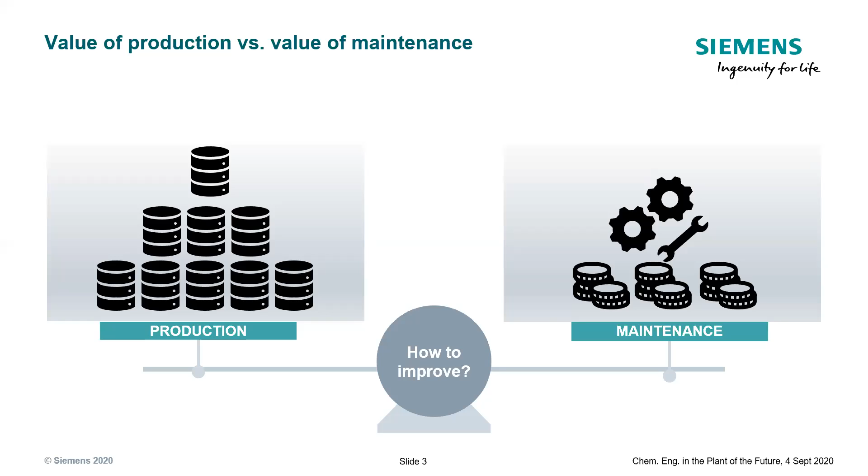Moreover, as we know today, it is more and more difficult or almost impossible to build a new plant, especially in the Western countries. Therefore, there has been in the last years a growing attention to maintenance, and in particular, how the digital application can improve operational efficiency. And behind the digital application, I mean, digital means everything. Behind the digital application, we mean connectivity, analytics, and cloud. Lower cost of sensors, large availability of data, and larger broadband connection.

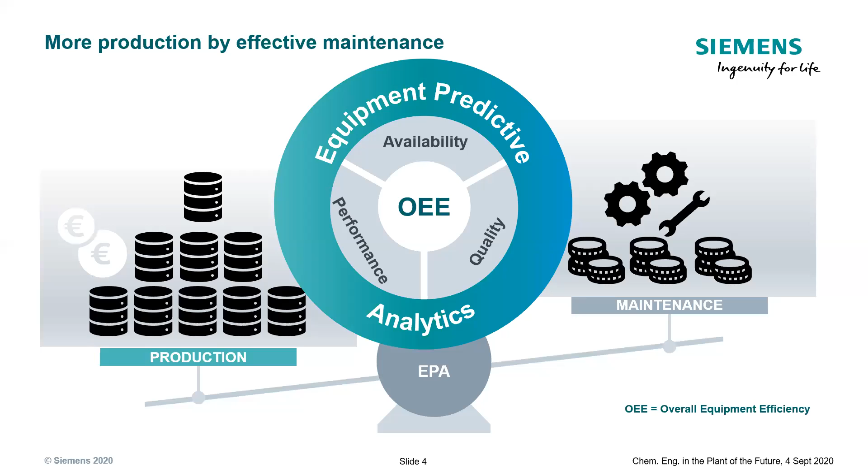For this reason, many data-driven analytics solutions have been developed to extract value from the data. This with the aim to improve the operation by more equipment availability, what we call uptime, and to improve the performances. The greater the process efficiency, the higher is the production. So what we need is to push plants to reach more than 100% of their design capability. Equipment predictive analytics is something today very attractive for all the industrial sectors, but there are significant differences and also different results between the different approaches.

If the algorithm is becoming adaptive, which means being able to adapt the model by new real-time data, it will be possible to recognize new patterns based on the current unit behavior. This is what we call machine learning.

Now, if we add a new layer of artificial intelligence that is called knowledge-based or case-based reasoning, which enables the EPA, I mean the equipment predictive analytics algorithm, to reason, to make choices by a database of snapshots of process conditions, we can improve significantly the response and related action effectiveness of the tools. But we will say something more in some slides later.

So just for showing something without too much detail, but anyway, going through the main steps of what is the approach in equipment predictive analytics. Three main steps. First one is to identify the target sensor correlation. In a plant, around the unit we have a huge number of sensors providing info about the equipment behavior. Depending on the focus objective or the target we have, we should identify which are the output variables and which are the input variables to build the corresponding best EPA model.

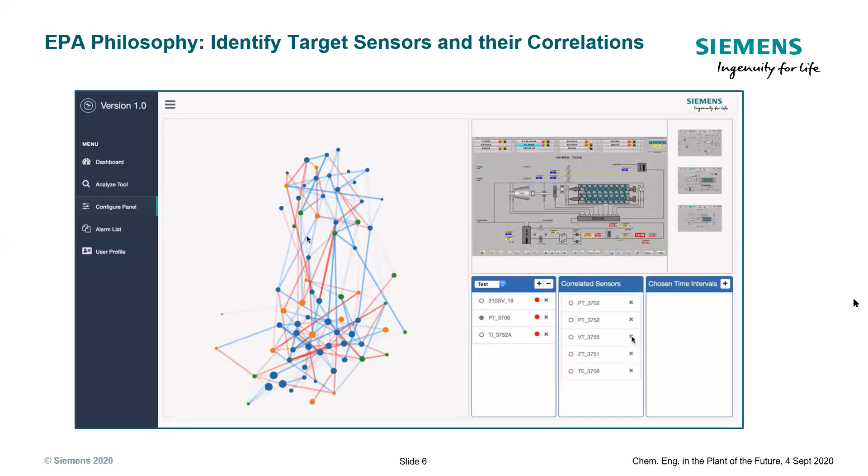Okay. So once the model is identified, what is needed is to train the model. And as you know, any data-driven model, and this is important, based on statistic or neural network algorithm, can be used to predict only something that it learned. In other words, it cannot predict a unit behavior that wasn't presented to the algorithm through the historical data.

Therefore, there is a need to select properly the data set to be used for the model to train. And either we spend hours by the data scientist, or we use a proper user-friendly tool that allows the user to move in the ocean of info and select the proper one to create a reliable EPA model.

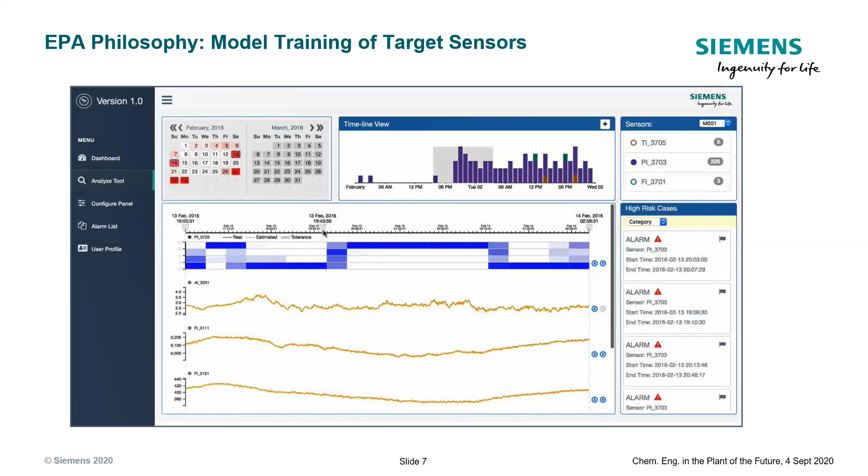Once the model is designed, now we need to use it for monitoring the equipment behavior and to predict fault and anomaly. There is no time now to go through all the details presented in the slide, but what is important to underline is the capability to create, through the tool, intuitive dashboards representing a number of target sensors through simple and schematic types of plots, providing the operator with a clear overview summary of the process condition.

But anyway, despite the dashboarding, the EPA tool based on the predictive behavior should also provide alerts whenever a constraint or a threshold has been violated.

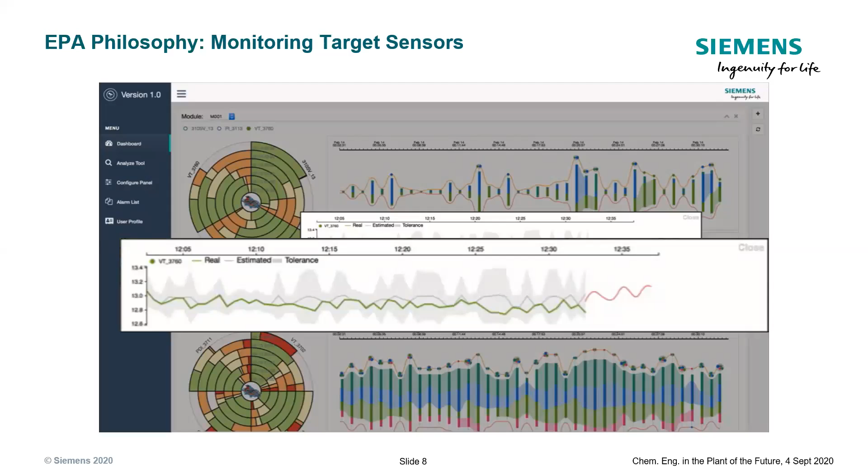So now let's move to what we mean with the artificial intelligence layer. As mentioned before, a machine learning tool is based on a pure data-driven approach, and it has two main limits. It provides an alert without suggestion on remediation, and it could be subject to false positives. This is something very important, which means that the alert could be generated from, let me say, numeric noise or bias, and if judged alone, it could bring to a wrong decision.

So artificial intelligence can help to improve performance of the machine learning tools by what we call CBR algorithm, or case-based reasoning, or knowledge-based approach. This consists in capturing the know-how or the knowledge of experts and experienced people in a kind of data archive matrix. Each matrix will consist, for each equipment, of a number of historical fault cases represented by the value of the sensors in that condition. So a snapshot represents the status of the equipment in that condition, with the corresponding procedures for the anomaly resolution.

The CBR algorithm will compare the data coming from the machine learning with the snapshots in the data archive and reason among, let me say, the similar conditions. It can provide validation of the possible alerts, at the same time presenting in advance the list of actions to be taken to resolve the potential fault.

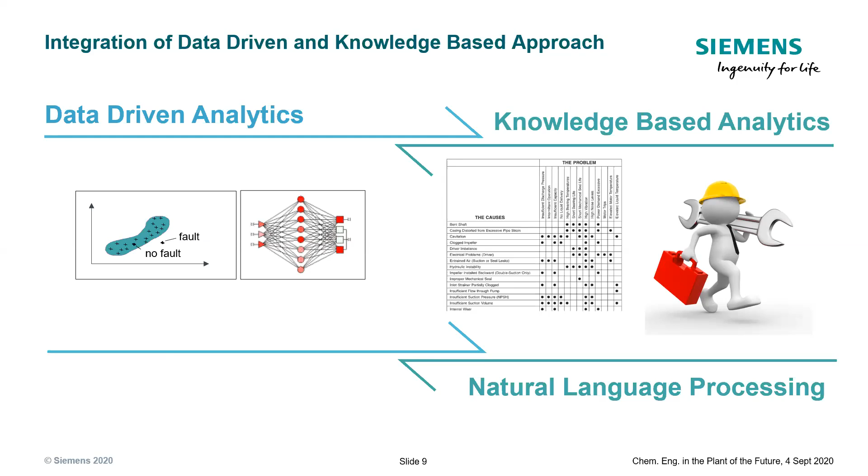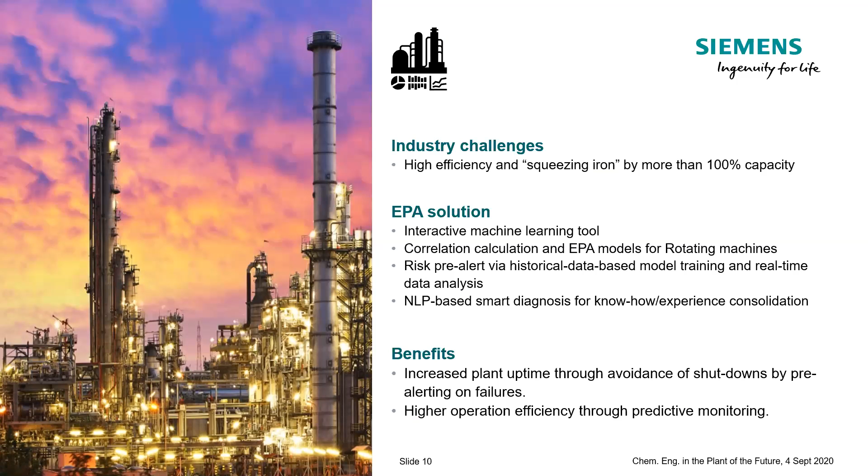A few examples now. Obviously, the key question, as reported also in the previous presentation: are these tools working and reliable in an industrial environment? Here following there are a couple of examples, which, I apologize, for time reasons I will go through very briefly. As mentioned, especially in the oil and gas industry, new plants are more and more difficult to build. And for this reason, oil and gas is one of the main sectors trying to squeeze the iron over the capacity. The critical equipment for maintenance to avoid unexpected shutdown are typically the rotating machines, like the pump, the compressor, the turbine. No faults means higher uptime, and so higher production.

This is an example of how the equipment predictive analytics tool works in our case. All processes are normally equipped, as we know, with a control system and with a number of constraints and thresholds on the various parameters. For the conventional control monitor system, the issue is that once the alarm is generated, we are essentially on a no-return way, and the fault is going to happen. So the equipment predictive analytics tool must be able to predict the event in advance.

Not only for the oil and gas and petrochemical industry is the EPA, the equipment predictive analytics, relevant. Another sector, for example, presented in this slide, is the cement industry. Here we have big rotating and moving machines plus a large flow of solid material. This could generate faults from crust formation, stacks of material, creating plaques and blockage of the unit. The EPA tool has been applied in this case to monitor the three main units: the preheater, the rotating kiln, and the clinker cooler.

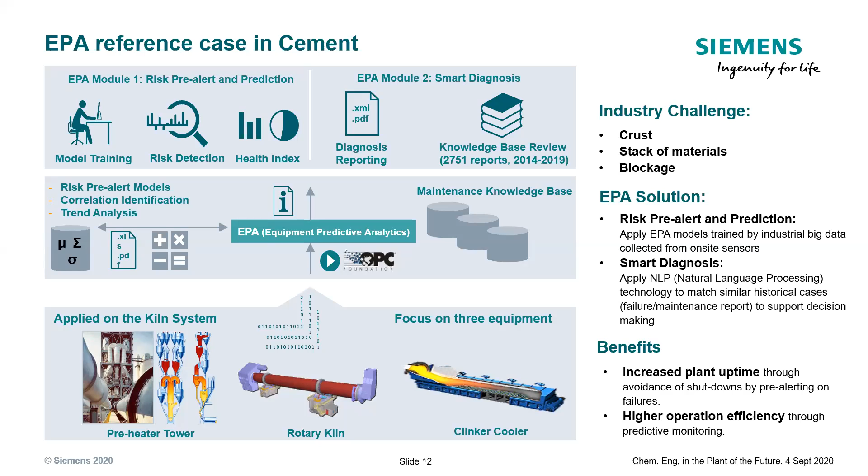Here in the slide, we show the EPA application that was able to predict more than 2 hours in advance the fault alarm of the control system, which is given by the control system. The EPA recognized in advance that this type of unstable inlet temperature for the preheater was causing, or there was a potential question of, crust formation leading to an unplanned shutdown.

Again, the 2 hours in advance allowed the operators to validate the alert, again, false positive possible in case, and to follow the suggested procedures.

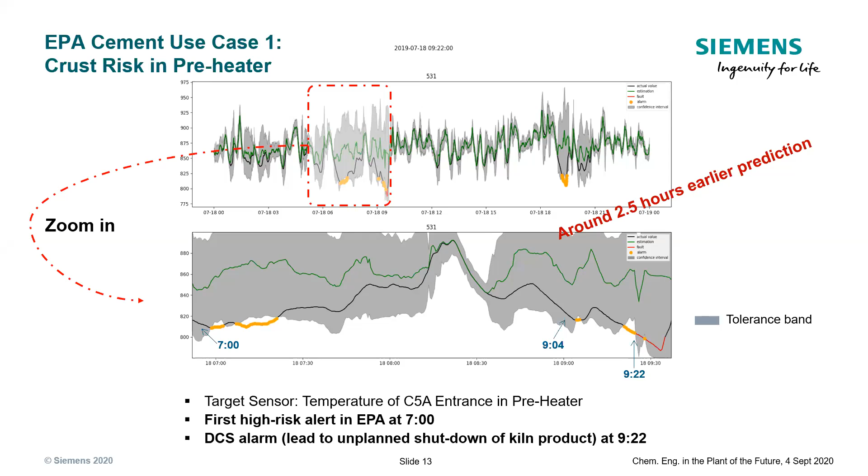Here, I'm trying to give you an overview through a video, because to be really adopted in industrial environment, this type of tool cannot be simply mathematical tools managed by data scientists or domain experts. They need to be easy, user-friendly, and create a collaborative environment between multiple roles and people. And actually, they need to have the capability to define or to clean possible false positives.

So this is a short video. I apologize because the video has been cut to reduce the time and to avoid also the commercial part. The full video is available anyway on YouTube. And I hope everybody can hear the audio.

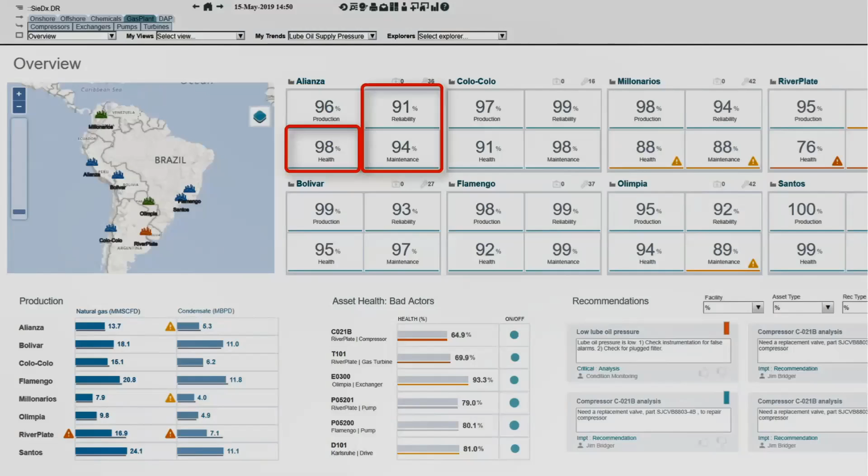The focus on turbines in our petrochemicals division. In this example, the organization has 8 chemical plants scattered across a continent. KPIs are calculated for each asset and each type of production and are shown here. At this level, we can also see overall production KPIs and equipment health indicators at each facility, some production information, and even a list of bad actors, which allows us to go immediately to problematic assets.

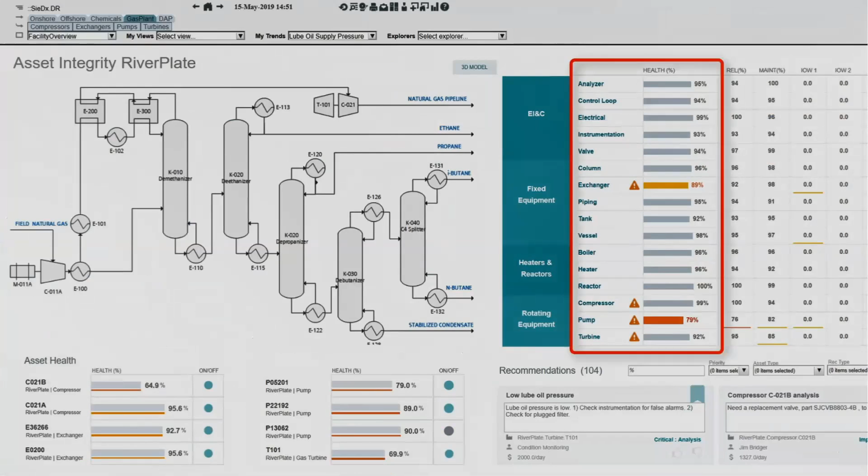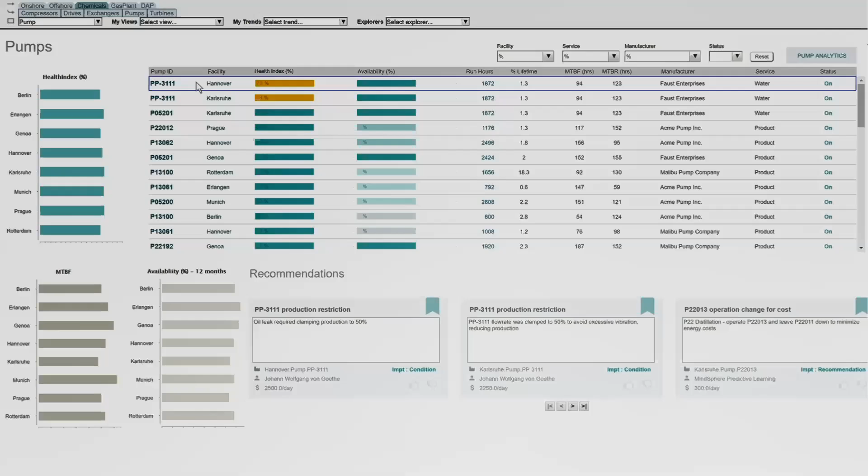Let's take a closer look at the plant that seems to be causing the most trouble. At the plant level, we can see asset health by asset type, like exchangers, compressors, pumps, turbines, and so on. The portal gives us insight into many types of assets throughout this facility and combines basic engineering with sophisticated technical information from Siemens experts and other sources. We can look at pump data or heat exchangers.

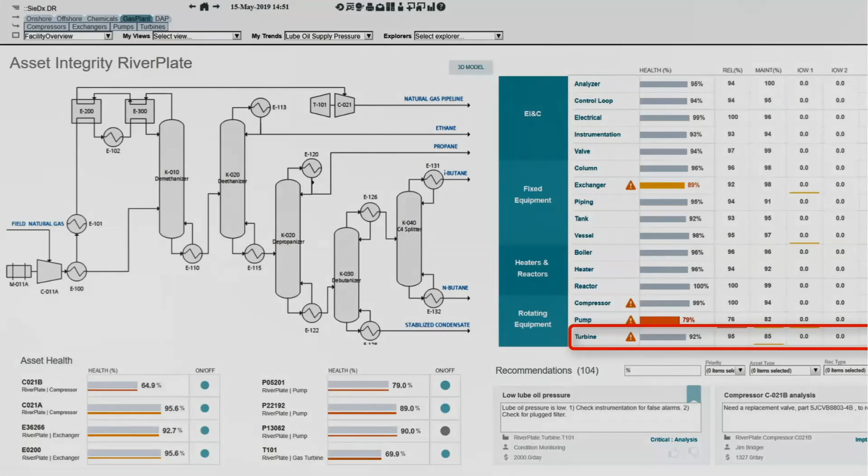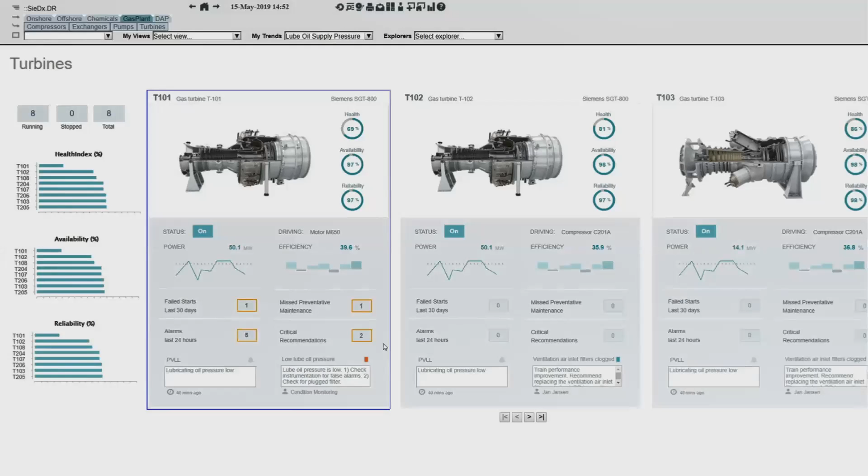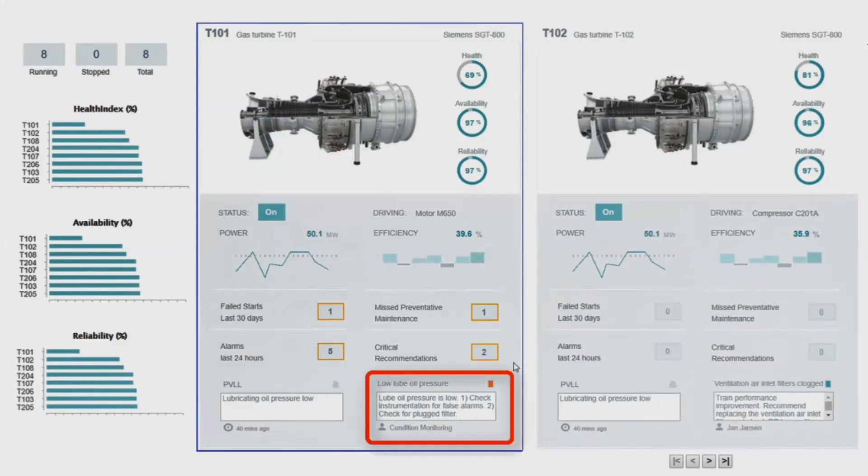Back in the plant view, the health indicators have flagged an issue with the turbines. The overall health indicator looks good, but let's take a closer look at the turbine family. Here we see our fleet, sorted by health index. It looks like all 8 are running. The first one on the list, an SGT800, appears to be having problems. This turbine is running, generating power. It does have a failed start in the last 30 days and several alarms. Our condition monitoring application has raised an issue involving lube oil pressure. Based off this information, this is likely our bad actor and the one we need to investigate.

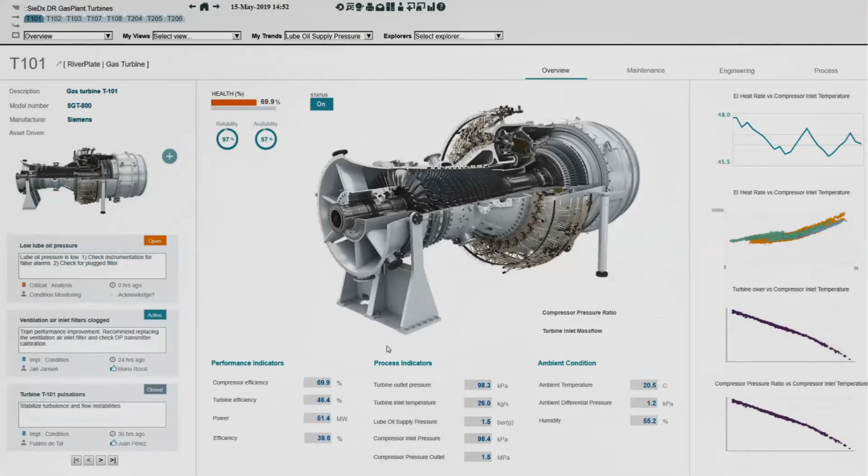Now we're at the level of an individual asset. The left panel shows conditions that have been raised. At the top of the list is our lube oil pressure. That's the newest condition, and it has not been acknowledged or worked by anyone. So we'll focus on that one. Our advanced analytics analysis suggests checking instrumentation for false alarms and for a plugged filter. This overview screen shows some overall performance indicators and key process variables.

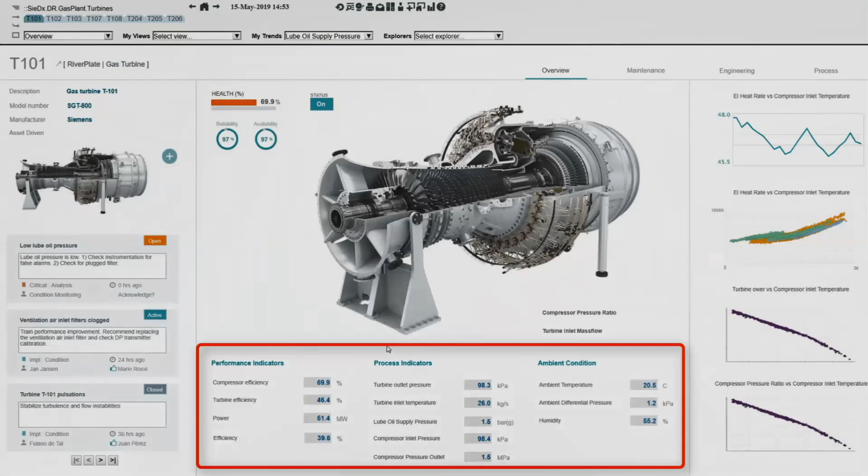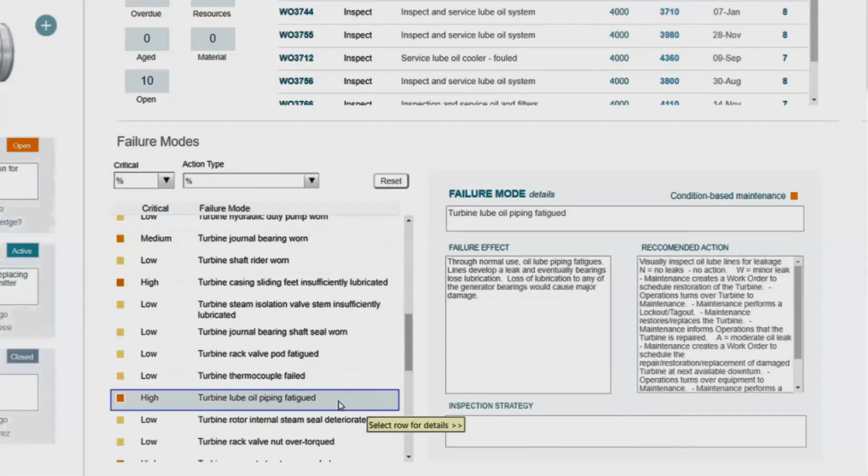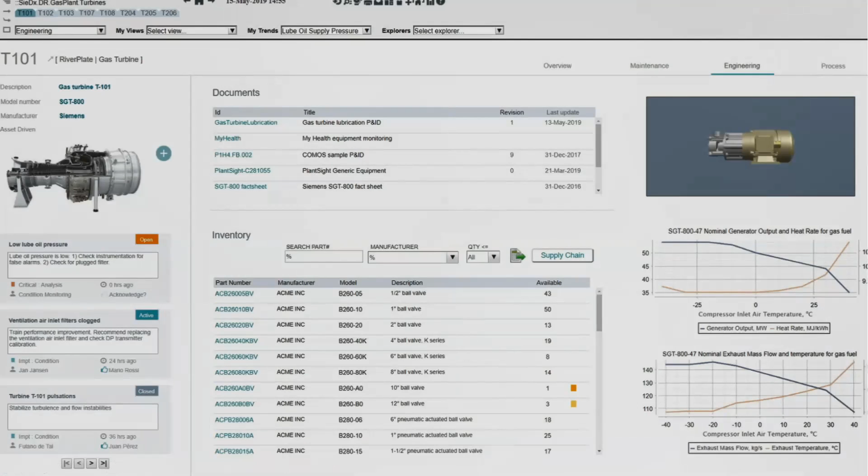When we look at the maintenance view, nothing interesting comes up. There's a history of inspections on the lube oil system, although the most recent one was several months ago. Here we also see some failure modes. We may want to look into that further and see failure modes related to the lube oil system. As we scroll down, we see the lube oil piping fatigued, potentially a critical error, along with some failure effects and recommended actions. With the engineering view, we can see documents, parts inventories, and some design information. Let's take a look at the documents we have.

Yeah, just some few notes in conclusion to recap. So the first point is the EPA approach requires effort, as we mentioned also in the previous presentation. It's not something that is coming for free. The EPA provides alerts, but with no knowledge. So we need to have something that will transform the alert into a recommendation or a solution.

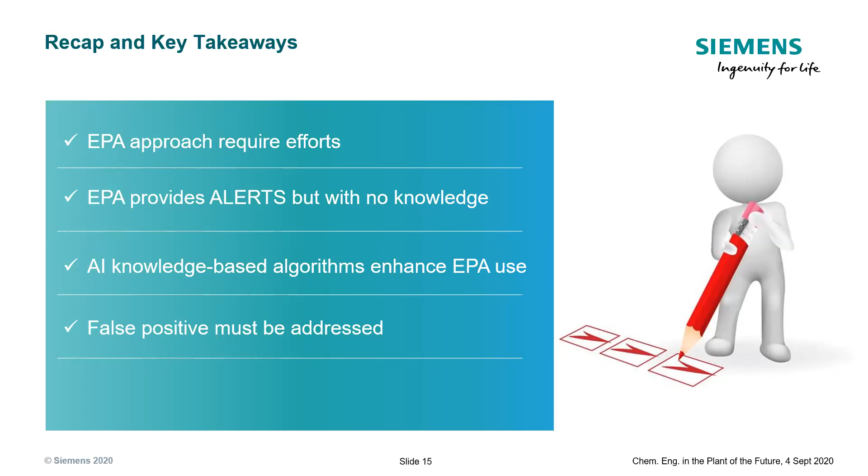Okay. The artificial intelligence knowledge-based algorithm can definitely improve and facilitate the EPA type of tools and use. False positives are key and must be addressed. In industrial terms, whenever there is a decision that needs to be taken for an alert, there is also a need to be sure that the action and the procedures to follow will be based on robust information.

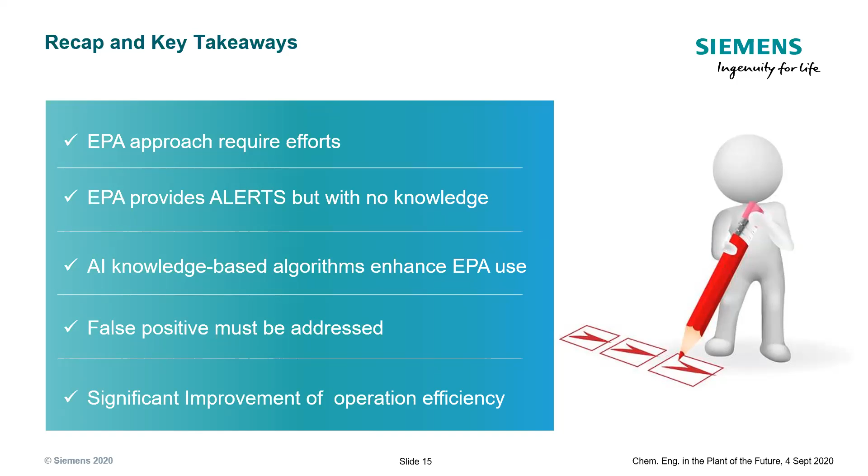Anyway, a significant, large improvement can be obtained using this type of technology. So thank you very much, and if there is any question, I will be happy to answer.